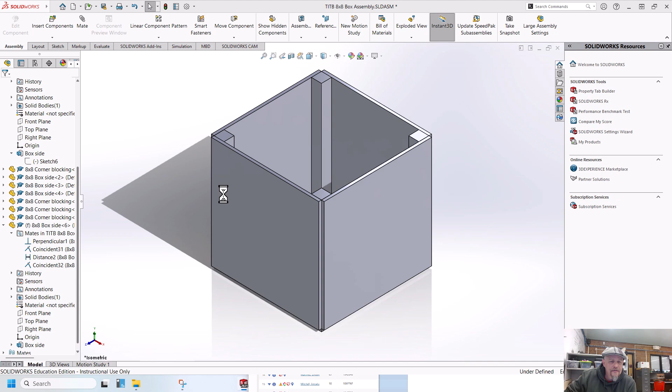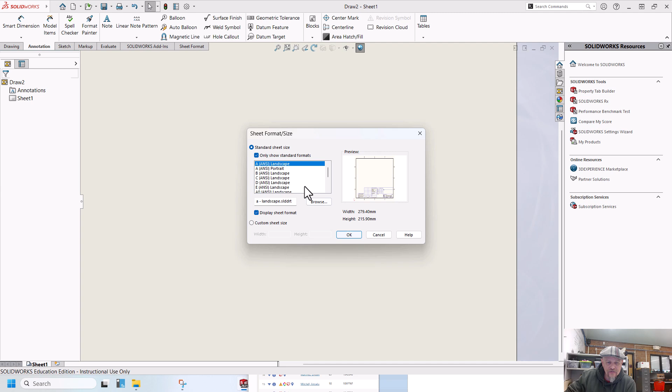These are different sizes of paper, and something cool to know is A size paper is 8.5 by 11. This is 8.5 by 11 in metric. We want landscape as opposed to portrait, which is up and down. We want a wider sheet than tall. And here we go, all right.

First thing we want to do is create an overall view of our part. We're going to start with model view here in the drawing ribbon. My assembly comes up as an option because it's already open in SOLIDWORKS, and I double click on that to bring up my options.

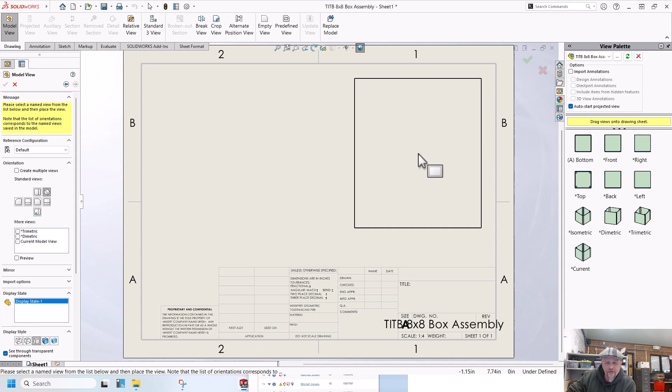So first off, I'm going to locate the view, just one click. Now I have some options, for instance my display style. I can choose how I want to see the geometry. I like hidden lines.

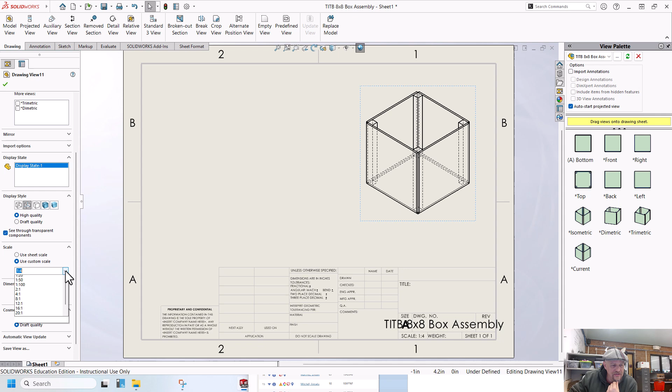Maybe your part is way too big. You can go in and use custom scale and bring it to a smaller scale. I actually really like 1/4 scale for this, and yeah, that should be good. We want lots of room here because we're going to do some other stuff. Go ahead and approve that.

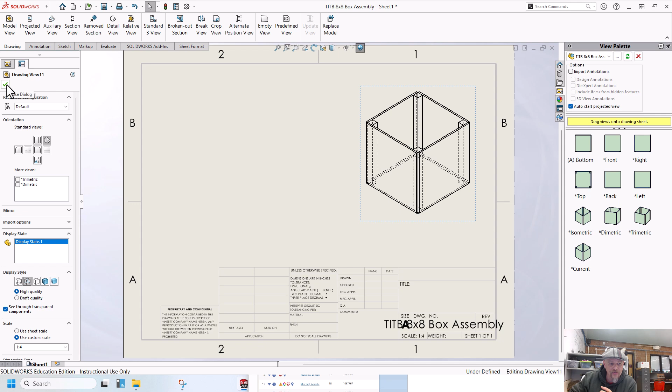Remember, if later on I want to change anything, we can right click on it and go to Edit Feature, and we're right back to where we were to change things. All right, that is our part, or rather our assembly, and I would like to know what these parts are.

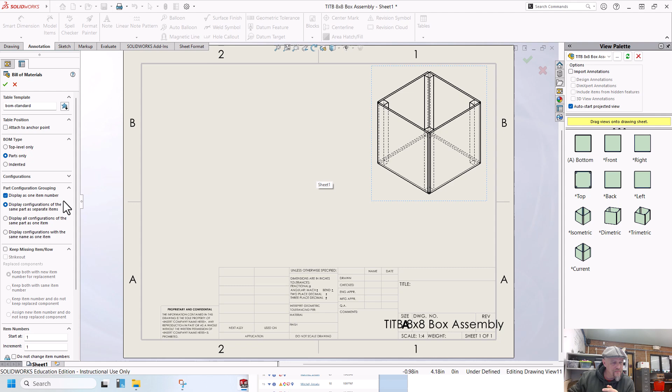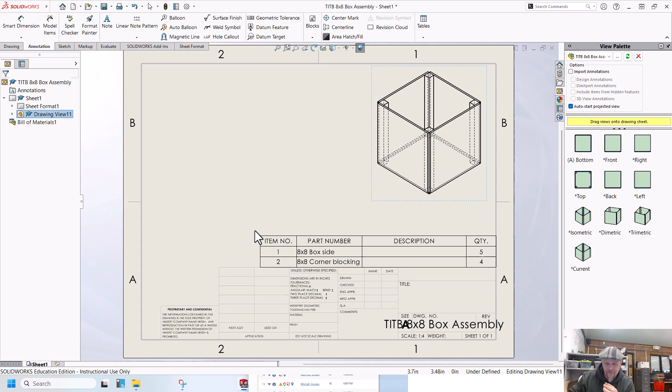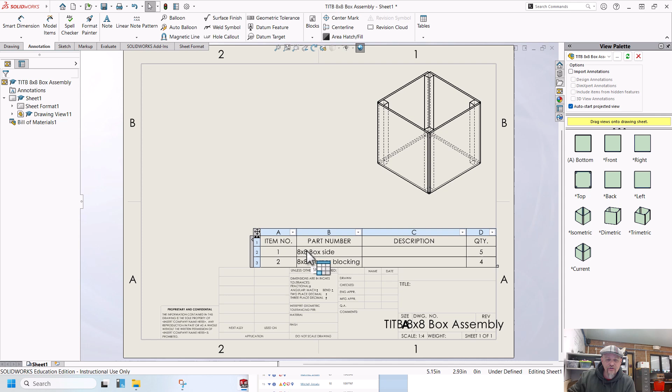And I am going to park that right here with what's called a title block. Now I know that this assembly includes the 8x8 box side, and there's 5 of those, and the 8x8 corner blocking, there's 4 of those. Now, these are my file names, so if you chose crappy file names, you might want to go back and change those. Cool, so I know what the parts are, I know how many there are, but I don't know which of these is what.

So next, I'm going to go over to Balloon, and I'm going to click on that part. I'm kind of thinking here - we can edit all this, but I know that's going to be a nice spot because I'm going to have all 4 of these point to the same balloon, since all 4 of these are the same part. Check it out, it automatically chooses those as part 2 because those are the corner blocking. And then I can do the same thing here where I'm going to grab all of my sides.

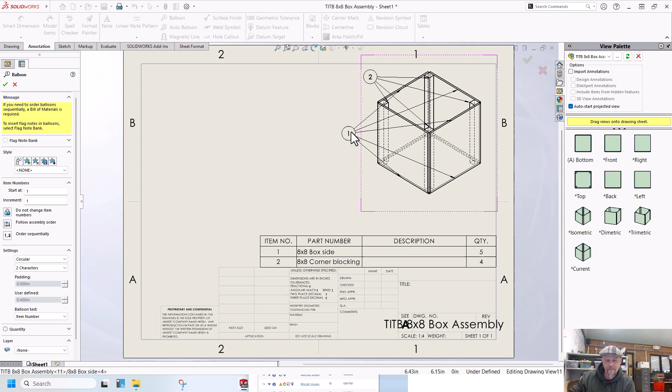There, now man, I'm looking at that and that's kind of confusing looking. I want to see if I can grab all of these balloons at once. Oh yeah, and I'm going to move it like that, and that's going to make it a little easier to see all those parts. And actually, I'm noticing I need a balloon for my bottom part as well.

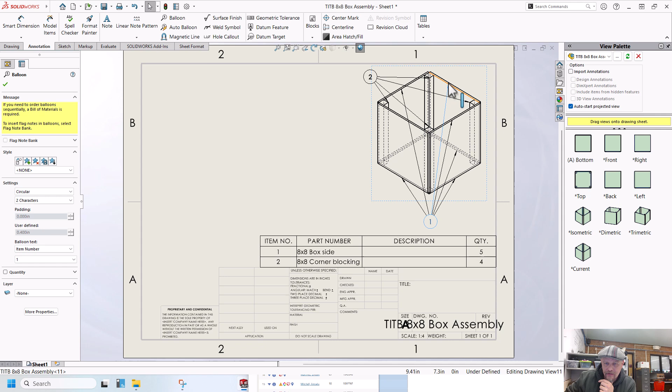All right, and last thing I don't like is these two lines are kind of in each other's business, so I should be able to grab this guy. Let's see here, grab this little point. There we go, I'm going to slide that off a little bit there. These drawings are all about being clear and easy to read, so I'm going to make little adjustments to be clear and easy to read. All right, oh, that got ugly.

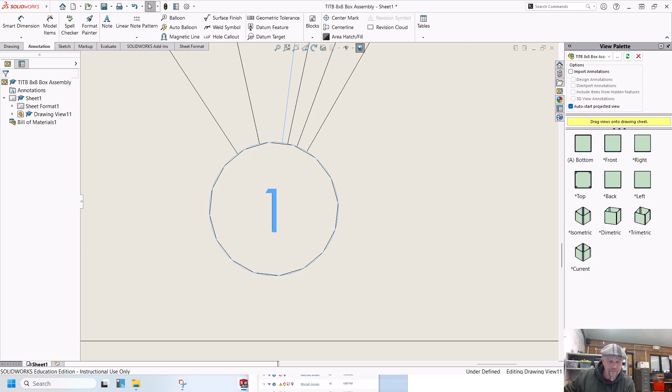Cool, looking good. So I know all my parts, I know where they go, I know how many I need. What I don't know is how big each part is. Now really, I gave myself pretty clear explanations of the parts in the file name, but I'm going to go out into the shop, it's going to be loud, I might be nervous about using the tools, so I'm going to give myself some nice, easy drawings to know what I'm going to do.

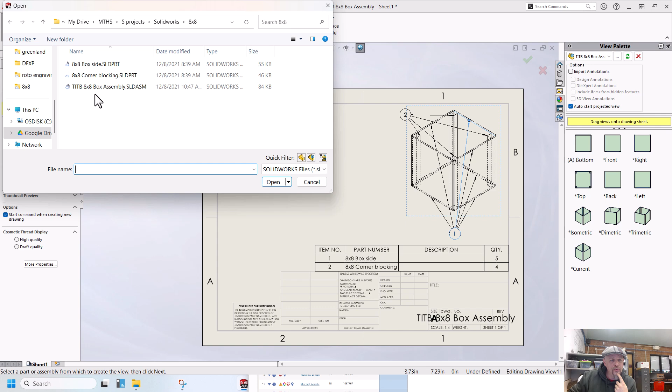So we started model view, and now I'm going to browse to my box side, one of my first parts. And boy, that looks really big. I'm going to place that, and that is what my box side looks like because it's just a square.

And I need to change my scale. I'm going to bring that down to 1/4. And I had this problem before, it didn't update. But what it's doing here is it's showing me my projected view of the part. This is the side view of this part, and it's really goofy that they're in different scales. But I'm going to place it and hit OK.

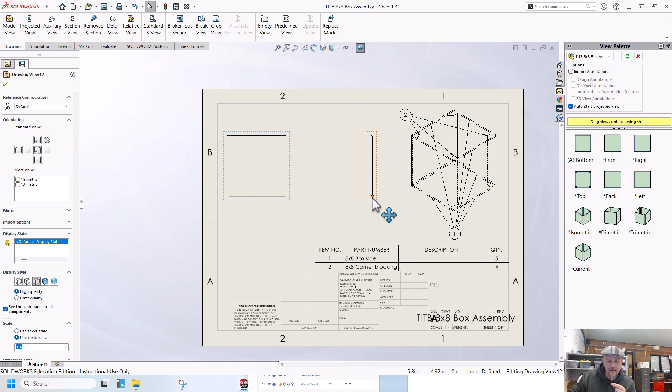And then I'm going to click on this guy again, and now I can go into 1/4 scale. There we go. Now what's really cool is these views have to stay lined up, because if this is just sitting down over here, you won't know that this is a side view of this front face of the thing. So SolidWorks knows that, and if I move this one, it keeps them aligned. So I'm going to bring this up a little bit, and bring this over like so, so it looks nice and organized.

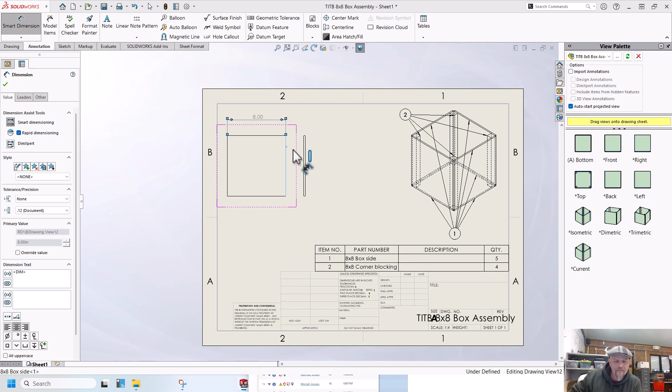And then we're going to go to Annotate, good old Smart Dimension. And I'm going to tell myself the size of this. Computer's running slow, but I'll go ahead and give myself the thickness there. We know it's going to be 0.2, but I just want to be nice and clear in the shop.

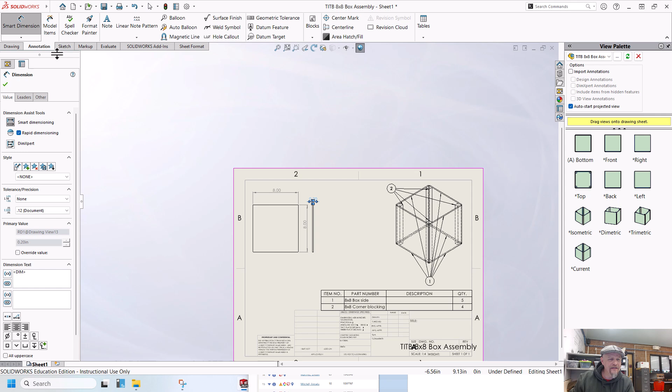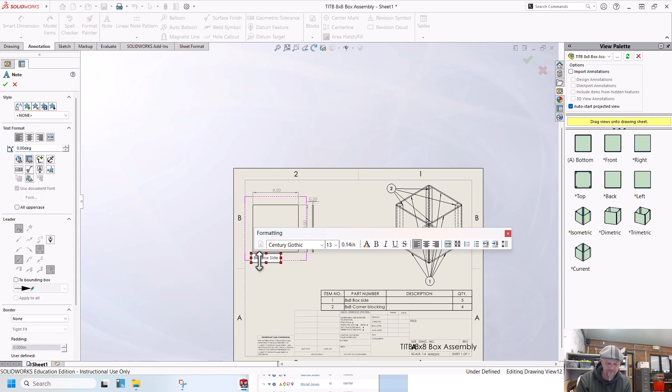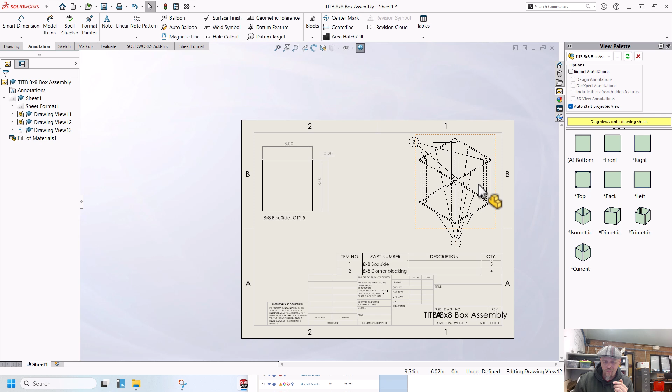And finally, I'm going to put a note right here, and I'm going to say this is my 8x8 box side, QTY 5. And hit OK. Nice, so a little redundant, but I can see here I need to make 5 of these, I can see where those 5 go, and I can see my parts list as a bit of a check off to make sure that I've gotten everything done.

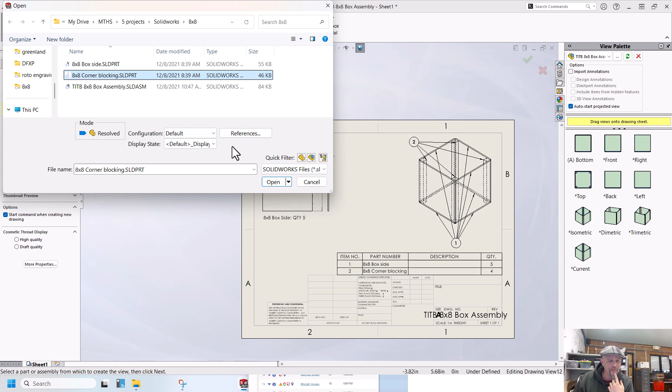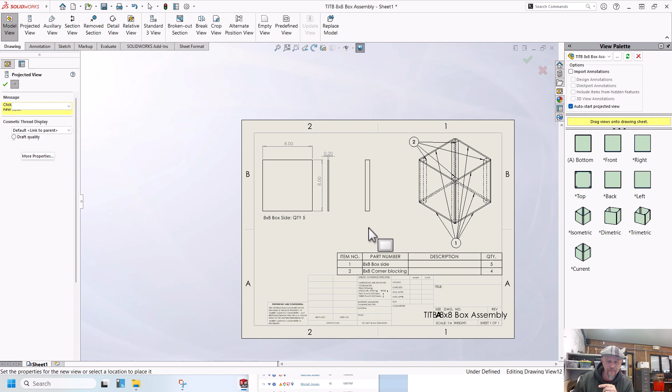I'm going to go through that same process again for my corner blocking. So, drawing, model view, browse, find my corner blocking, open it up. Now I think before I click this, I'm going to come down, bring that scale to 1/4 its size, we'll put it here, and it should give me my projected view.

All right, so that was a little smoother than before. Annotation, dimension. Now, again, I'm giving you the material, so we already know this is 3/4 by 3/4, but I want to put it there so all the information I need is in place. And maybe you're doing something a little bit more custom than that, you're shaving your blocking down, so we want the info.

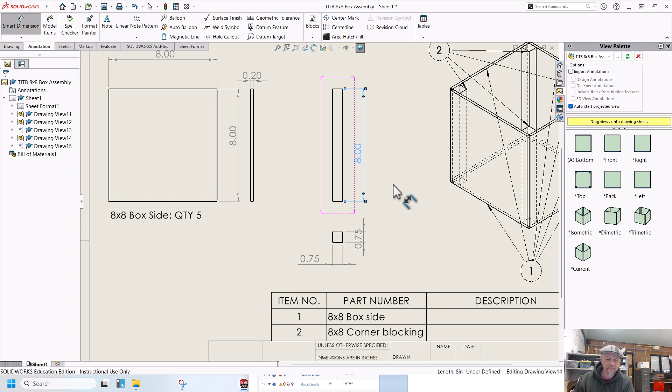All right, that almost looks good. This is ugly, see how those lines are going through the numbers? I don't want to do that. So I'm going to grab it, bring it over to that side. I don't like that this line is getting in the way of that, so I'm going to bring it over to that side.

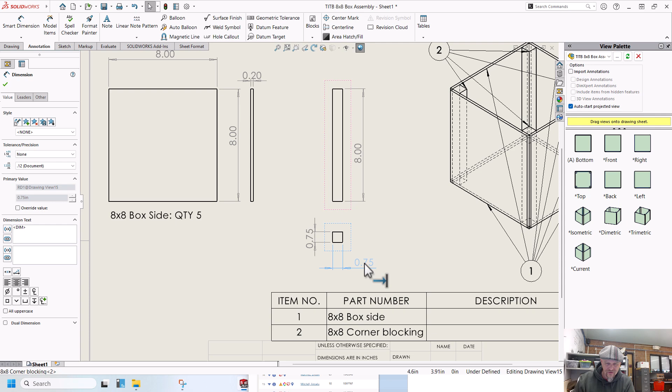And we're looking pretty good. You know what? I'm going to bring this whole view up over here. Then I'm going to bring that dimension up there. Beautimous, looking good. Last thing I need to do is add a note.

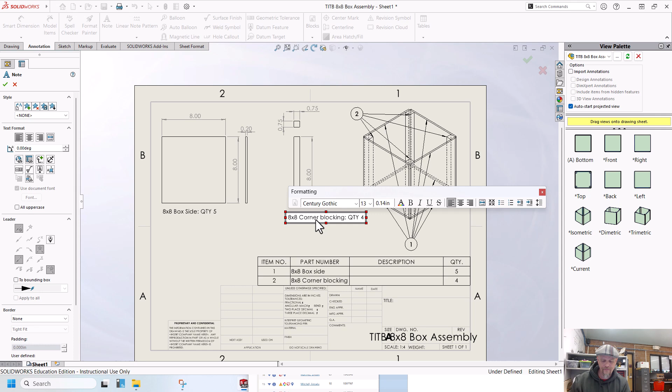Put it right about there. And this is 8x8 corner blocking, colon, QTY for quantity 4. Good enough, hit OK. I don't like how this is kind of creeping over to that, so I'm just going to move it over here and center it up better. All right.

For some of you, that's all you need. Keep watching the video if you have started to run out of space, because I'm going to show you guys how to bleed this over onto another sheet.

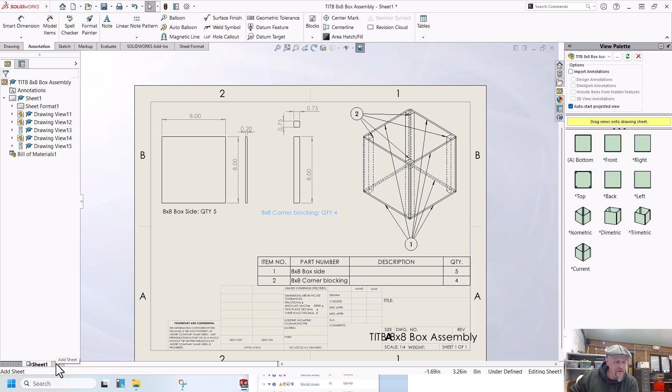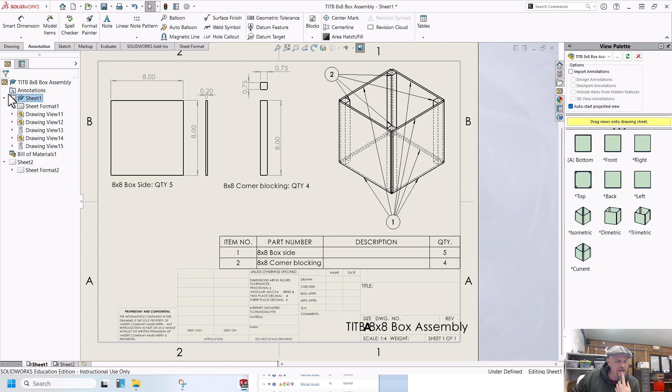And the way you do that is come down here, hit Add Sheet. And now I have Sheet 1, Sheet 2. And let's say I'm going to have all of my parts on Sheet 1, and I just want to bring my assembly and my bill of materials onto Sheet 2. Well, you do that right here. So here's my Sheet 1, here's my Sheet 2.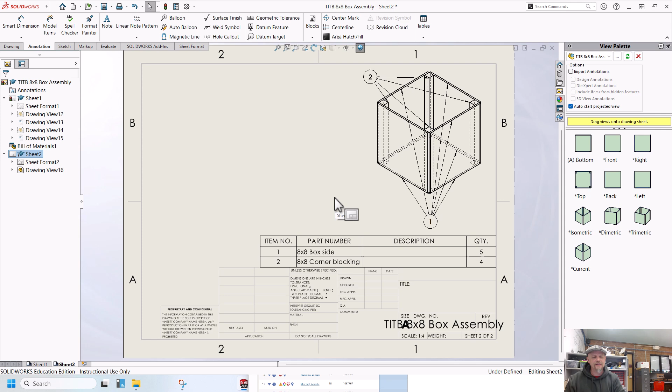I'm going to bring, I don't remember what these are called, so I'm going to click on them. That is Drawing View 16. So I'm going to bring Drawing View 16 onto Sheet 2. Bye-bye. And my bill of materials, we'll bring that over to Sheet 2. And they stayed in the same location, so I'm nice and organized, and I have more room for my parts.

All right guys, remember, rewatch the video, pause, do a little step, watch a little video, pause, do a little step, and always be willing to ask for help, because this stuff is hard.